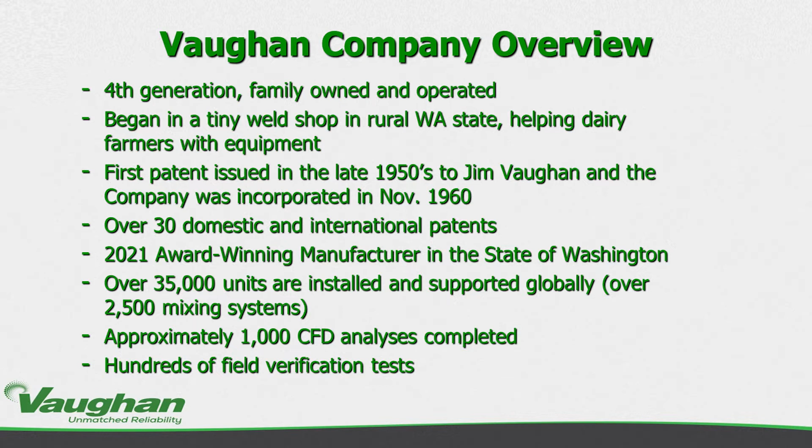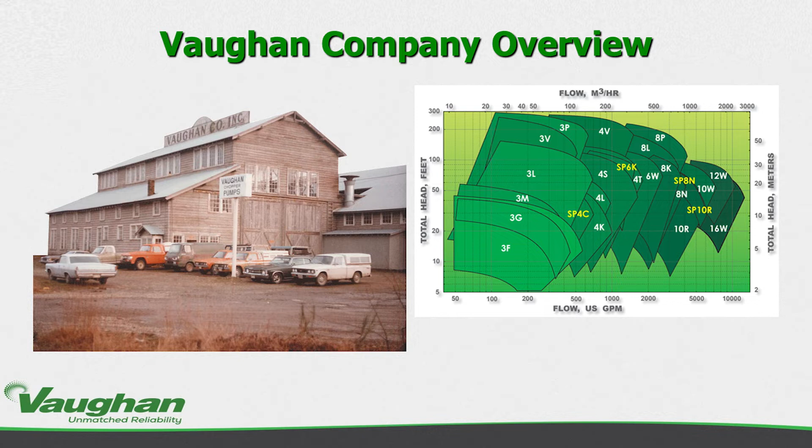I'm giving you a little bit of overview of a full map range. We sell pumps all the way down from 50 gallons a minute up to in excess of 13,000 gallons a minute. And we're all operating out of what has become a much expanded old Schaefer logging mill here in Montesano, Washington. We have just a massive holding of inventory, and in today's global economic situation, having inventory here domestically in the United States ready to ship to you when you need it is more important than ever.

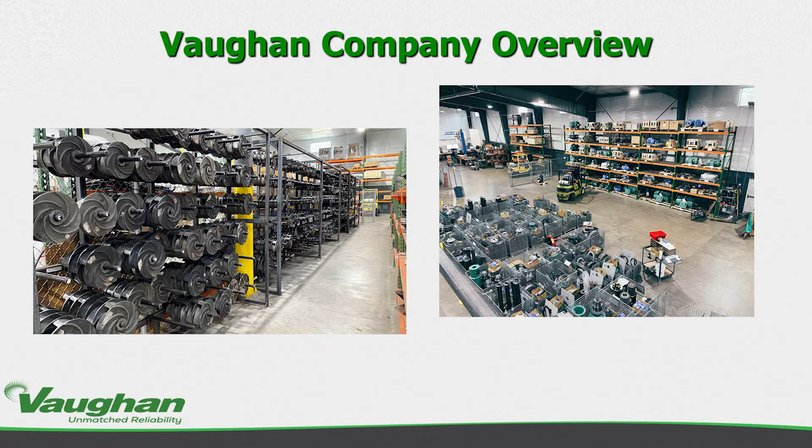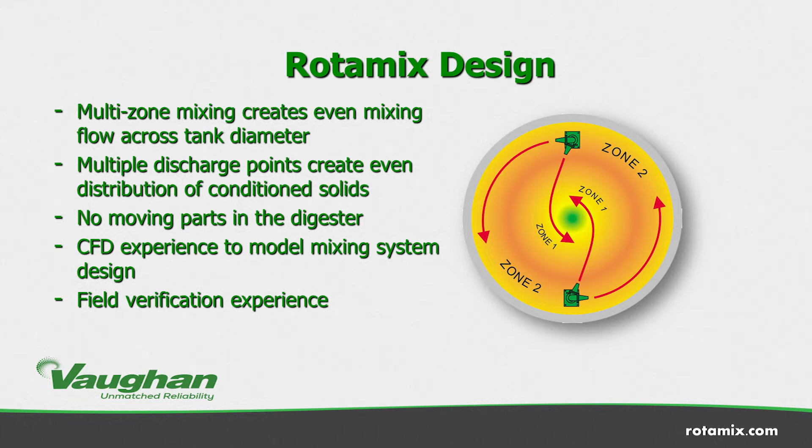So Rotamix mixing systems, they're hydraulic mixing systems using fixed nozzles and external Vaughan chopper pumps. Rotamix design is a multi-zone mixing, which creates even mixing flow across the tank diameter. Its multiple discharge points create even distributions of conditioned solids. No moving parts in the digester, CFD experience in every system, and field verification experience to make sure that what you install is operating and commissions exactly as designed.

Some of our previous Vaughan webinars covered various topics: from wipes, designing for the new sewage reality, covering some of the more unique challenges facing our collection systems across the world and in the United States specifically. We have In the Mix, Dealing with Indigestion, all talking about different steps in the digestion process and different influences that mixing and other operating conditions have on those processes. And then Bypass the Competition, Avoiding Cleanups with Portable Pumps, looking at our portable pump options and the importance of bypass for maintaining robust operations at facilities. I'll mention all of these are on demand at chopperpumps.com/education and also on our YouTube page.

So the value of digester mixing. Why is digestion mixing important? And the answer is mixing is essential to the biological process.

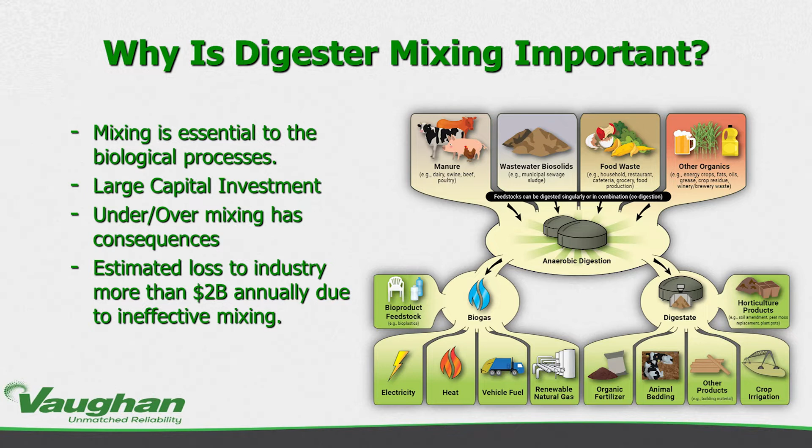It's a large capital investment, and over and under mixing has consequences. It's estimated that the loss to the industry, to municipal and industrial digestion, is more than $2 billion annually due to ineffective mixing. And this isn't just power costs. This is decreased dewaterability, additional sludge disposal fees, additional polymer costs—all of these additive things that add to the cost of operating your solids handling process, adding up over time during the multiple decades of operation of a facility during its design life.

So what does poor mixing look like? Instability with temperature variance, inhibitory pH—anything below 7.0 is going to start to inhibit your methanogen activity. And if you have poor mixing, you're going to see natural contaminants come through from your waste stream that you're not going to distribute and dilute. There's an old saying: the solution to pollution is dilution. When we look at contaminants in our waste stream, to the extent that we can't remove them, we try to dilute them so they have less impact on our biomass and aren't as destructive.

And inconsistent gas production. When you have poor mixing, you're going to have kind of a boom-bust gas production cycle, where every time you feed you provide that contact but don't distribute it evenly. So you get an uneven biological activity rate and see uneven gas production rates that spike and lag as you feed and as your feed changes.

And then operational challenges—we look at loss of volume from grit accumulation, scum surface accumulation taking up headspace, foaming issues, and ultimately these can lead to digester upsets and, unfortunately, bypass.

Eric, this is Steve Mack. I don't know if you can hear me, but hey, you're doing great so far. Thanks, Steve. How's everyone doing? Don't you just love technology? Absolutely. So, hi everyone, yeah for sure. So boy, do we look forward to getting back in front of everyone. We're so happy that you're here in this forum, but I'll take over from here and continue on the way, as we've been doing.

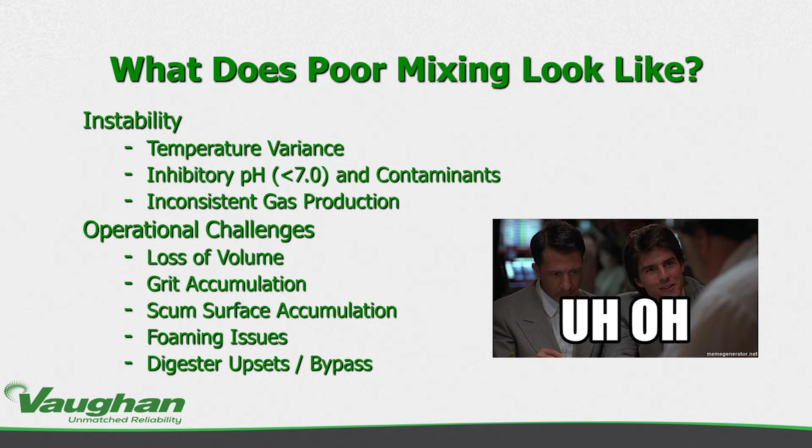Let's move to the next section of our presentation. We've talked a little about why mixing is important, and I'd like to talk next about how we design and verify mixing historically. Our industry has used different evaluation metrics that focus on ways to design a completely mixed digester and then verify as best we can that it has been built.

Historically, we start the design process with spreadsheets. We put in information including influent solids, mass, volume, substrate characteristics, and target operating parameters. Often we use a biological process model, BioWin or Sumo are very common. On the design side, we can use computational fluid dynamics to model velocities and shear stresses, to predict as best we can what's going to happen inside a digester, including piping interferences and actual geometry.

On the verification side, once it's designed, our biggest fear is that we built it for a certain volume and we're not going to meet our design requirements. So the design experience, including CFD and biological process modeling, is critical for partnering going forward.

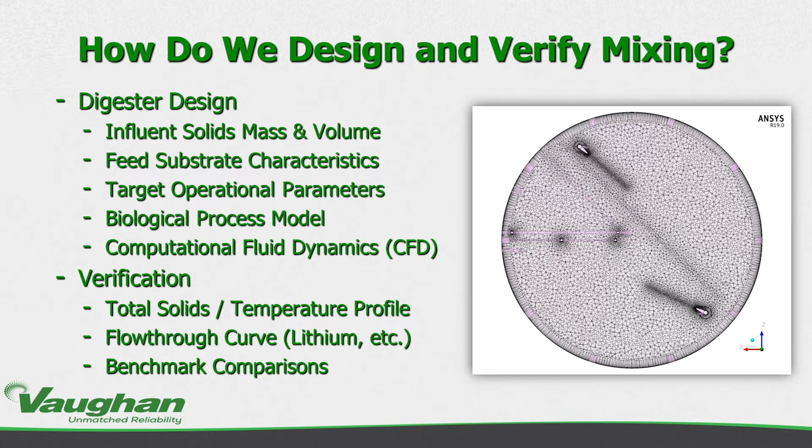All of that has to do with understanding and achieving a completely mixed digester, with a phrase we use a lot: active volume. Something like 90% active volume is typically seen in a specification. So what does that really mean?

These techniques are focused on achieving a minimum volume required to have success with the unit process. The volatile solids destruction we're trying to achieve, based on the specific rheology and the specific mix of blends sent to the digester, can only be achieved, let's say, with a 1 million gallon digester.

So we know from experience that we typically build in a roughly 10% margin of safety - 1.1 million gallons - and a requirement of 90% active volume will give us what's needed in the biological model to achieve success and meet regulations and our permit.

Although there's no clear industry definition of active volume, typical metrics we look at include CFD finding volumes of 90% at least with mixing velocities greater than 0.1 meters per second. We also look at statistical analysis of solids and temperature profiles, which indicates we have a homogeneous digester if those profiles are consistent.

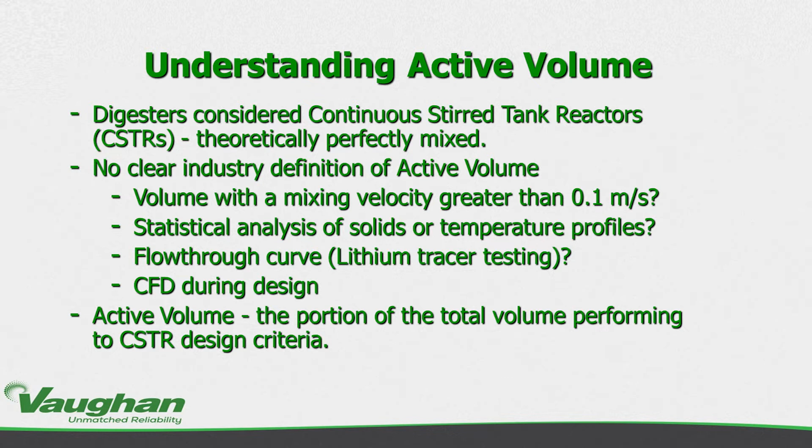Next, let's talk about some traditional design criteria used to verify that maximum active volume is achieved.

Mixing energy has always been a big part of the story, but it's only part of the story. We're trying to achieve a homogeneous mix for reasons we've gone into in great detail in our other webinars - if anyone has questions, please refer back to those or engage with us about why a homogeneous digester is important.

For energy, there are different rules of thumb - WEF MOP 8, Metcalf and Eddy. These are basically horsepower per unit volume; they're similar but use different units, one in gallons and one in cubic feet. Other processes may have different mixing energy requirements depending on rheology, and many factors can influence how much energy you need: tank geometry, rheology, and different obstructions.

That's where we've found in our experience that horsepower alone is not enough to build a digester - you need to consider CFD and all those other factors. Next slide, please.

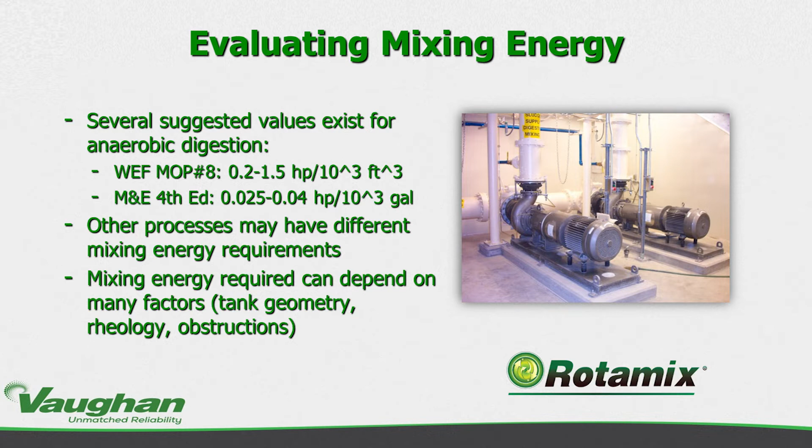These systems run 24/7, 365. So of course we understand that they're trying to have effective mixing with the least amount of power and the least operations and maintenance costs. And that has been a standard for many years, and we certainly like to hit that one out of the park.

There's other things we're going to be talking about shortly, but once the digester is built, how do we verify? Typically, temperature profile and total solids testing is something that we do. Vaughan ourselves has performed over 250 of these on-site physical verifications. They can be done in a few hours.

Typical acceptance criteria is looking for a vertical temperature gradient. At sample points it does not vary by more than 1 degree Celsius. That's based on what's needed by the methanogens doing their job in this digester, and again, total solid samples not varying more than about 10% of the arithmetic mean. So we look at those things. Again, that's all verification that our design is sound and we've achieved what we set out to achieve.

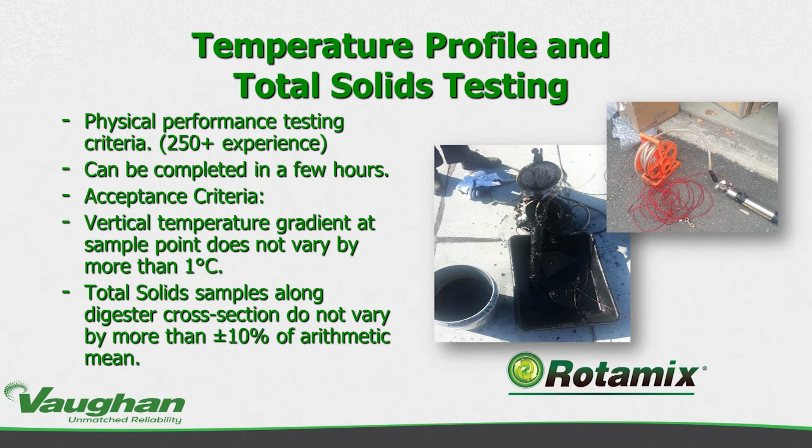So what's another critical tool that aids in the design is a CFD model, computational fluid dynamics. We can easily look at different mixing system alternatives. We can vary the design, nozzle placement, where we're putting our energy. We can model unique geometry, sludge rheologies. We can look at, with the non-Newtonian fluids, where the shear is occurring and how that translates into velocities.

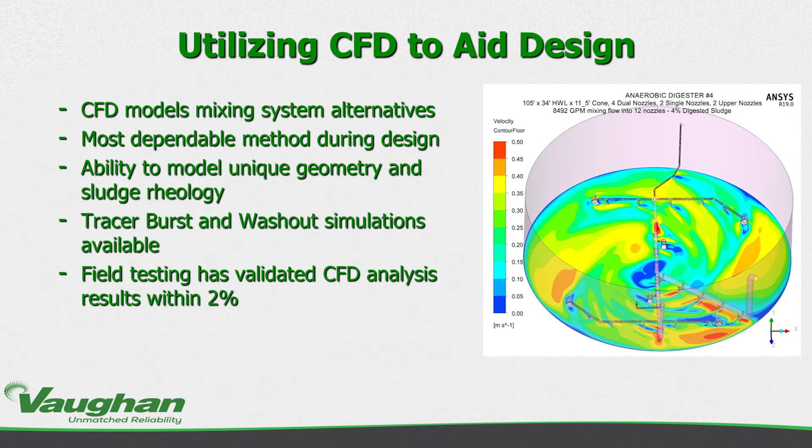We can simulate tracer bursts, washout simulations. The key there is doing this over time and having the field experience to verify that your CFD was correct, and to backfeed your future CFD analysis. So what we've seen at Vaughan is field testing has validated our analysis within 2%. That just means a washout simulation in CFD matches an actual, for example, tracer or temperature solids profile in the field. If we're looking at 97% active volume in our CFD, we're seeing within 2% of that in the field. Next slide.

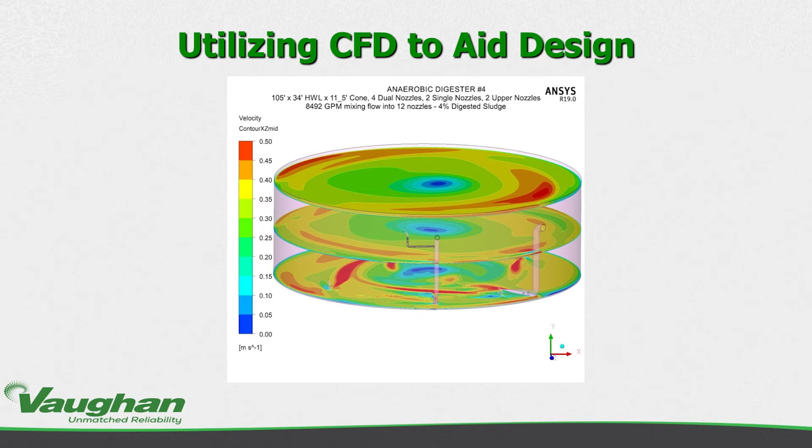Here's another example, we got one more slide after this one. It's just again showing some of the velocities and what we use to simulate and verify that our design is going to achieve complete mix. We have a library of these available that we refer to. So chances are any project that's being worked on, we've seen a similar diameter or orientation or rheology, all of the above. We have over 1,000 of these CFDs under our belt that we refer to, certainly some of them are available. We can perform a custom CFD as needed. If you have a large project and you really need that peace of mind, we can certainly do that.

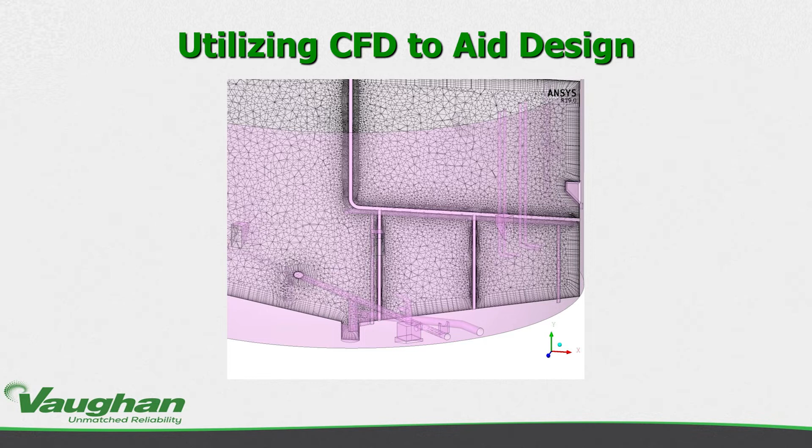So really showing a couple of pictures here of sort of what these look like. There's certainly a lot more to it. There's an entire presentation we've done on CFD, so please engage with us if you have further questions.

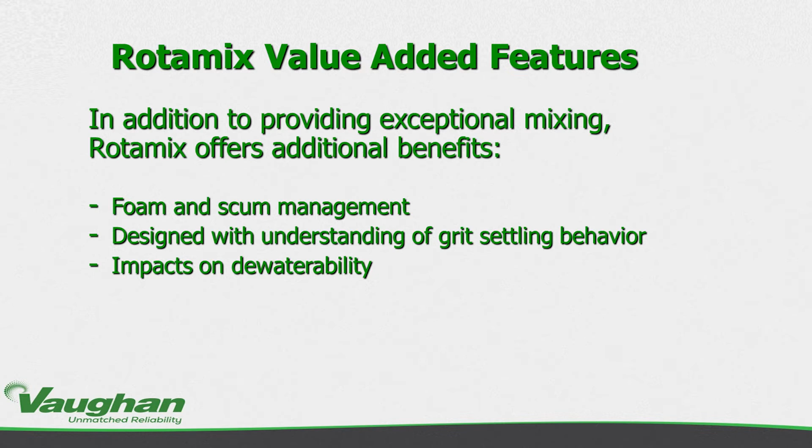This first topic is near and dear, and we saw in that poll that this is a common problem. We've done a specific webinar on the causes of foam and low density scum accumulation at the top of the digester—there are many reasons for foaming events. Chances are more than 75% of anaerobic digesters nationwide, or globally, will at some point experience a foaming event. I'd like to point you to our previous webinars for details on the causes of that.

But as far as mixing goes, there are some things we can do. Obviously, keeping a completely mixed digester will minimize foaming events—that's what the system can do to help, outside of other forces. And with scum, we can do things to try to keep that layer incorporated with the entire volume.

Those impacts are sort of qualitative in terms of performance and gas production. There's operational costs, equipment issues, potential structural damage from some foaming events, and safety costs—there's real value in keeping personnel safe, not having them slip on surfaces hit with foam. From a regulatory standpoint, we want to avoid permit violations from an overflow, and worst case, insufficient volatile solids destruction. These are the known qualitative and quantitative impacts of foam and scum we're all aware of, but how do we combat them with a tool in our toolbox—a mixing system.

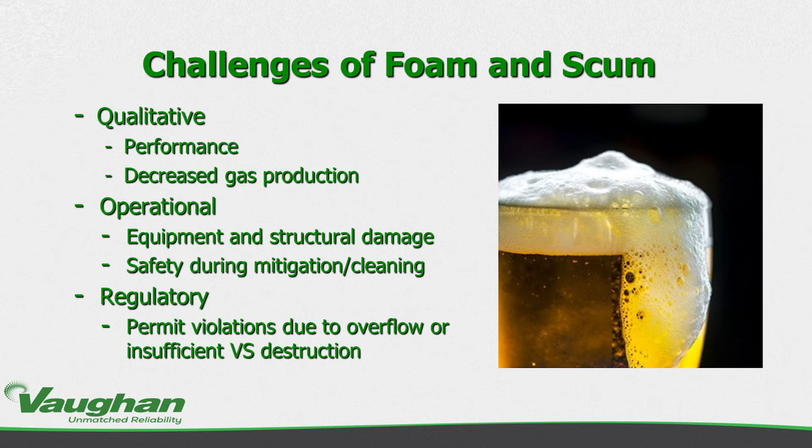Next slide. In our design at Vaughan, we have what's called a foam buster and a scum buster. These are nozzles; in the case of the foam buster, it's located above the liquid surface with a splash plate. We're showering a fan of sludge, high density, from the bottom of the digester through the pump, conditioned with a chopping action, and putting that down on top of any foaming event. This can be valved and used as needed, but since we don't always know when foaming events start, typically this just runs. This nozzle isn't imparting any horsepower into the mixing energy.

We talk about previous evaluations where we look at horsepower—Vaughan has put this tool above to combat foam, knowing it requires some horsepower to move liquid through this nozzle, but its value is in physically combating foaming problems. Throughout a wastewater treatment plant, where there are other areas in basins with foaming events, we typically find a way to spray liquid on top to physically knock down foam bubbles. This is essentially what we're doing in the digester, and it adds value. We have case studies that discuss that as well, which we can share with you.

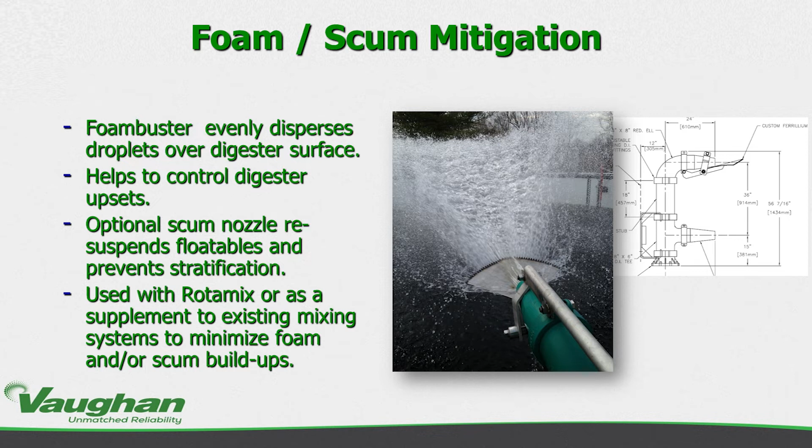One other tool we have to mitigate foam is a VFD, variable frequency drive. It offers some flexibility, allowing you to fine tune mixing energy for current processes. A nice byproduct of that is it can save up to 50% of energy costs, as we mentioned earlier.

It's a critical part of any evaluation. We do recommend that for any digester application. There are studies going on right now, in some cases seasonally, with different types of microthrix or different types of foaming causes.

Reducing mixing energy could be helpful. In some cases, there's current research looking at whether dramatically increasing mixing energy could help combat foaming caused by filament bacteria, with some shearing action through our pump, et cetera. So we're looking at cutting edge approaches to something that's been a problem forever with foaming. This is just one more tool in the toolbox to help you combat that.

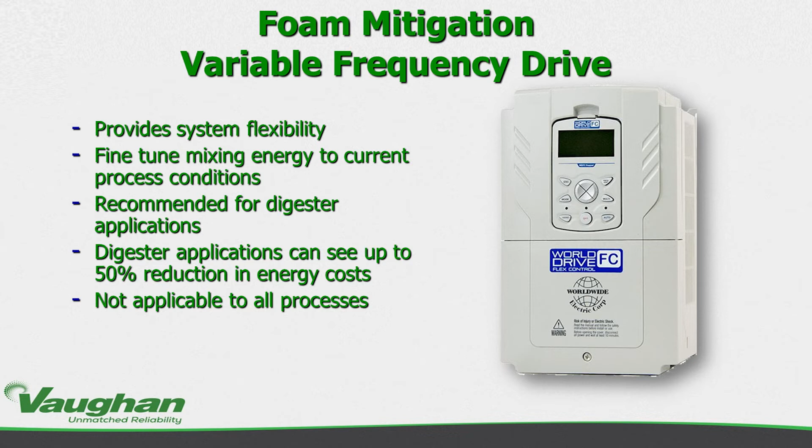Let's go on to grit. Now we've talked about this. It's obvious that grit management is critical for any digester, due to a loss of volume, not meeting your active volume needs, and not getting your volatile solids destruction.

The energy requirements in most designs do not necessarily create the velocities to keep grit from settling. We've all seen these digester cleanout projects. They're often on a 10-year cycle or sooner.

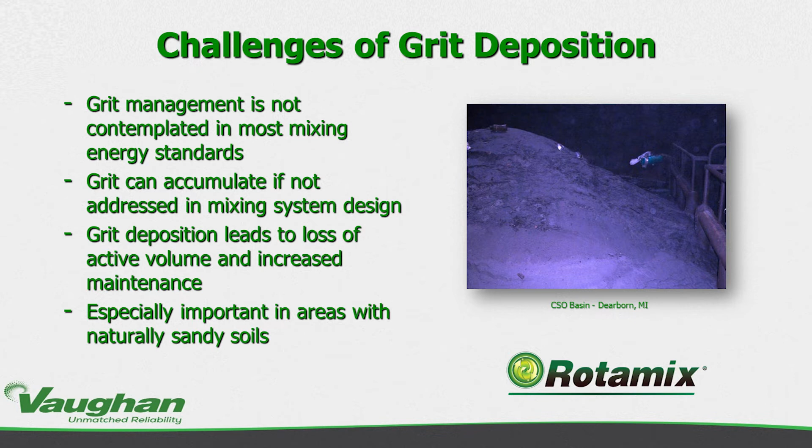I know personally there are some large utilities that are more on a 5 to 7 year cycle of needing to clean these digesters. If they don't do it, they lose their volume, which has impacts on downstream processes, and there's a real cost involved. Obviously it's more of a problem with sandy soils.

What we've learned through experience, and my background at Vaughan, is that even relatively large organically laden grit particles can have what's called a sand equivalent size that allows them to bypass modern grit removal systems. Think of a peanut M&M: that grit particle is the peanut, with the chocolate coating being the low density, low specific gravity organic material attached.

What we've seen is even with a 100 micron, fairly modern grit collection system, these organically laden grit particles could be a large particle over 100 or 120 microns, but behave as a much smaller particle. Once that grit particle is in the digester, it's going to start to digest that organic layer, and it becomes more and more difficult to remove as it behaves like a larger particle.

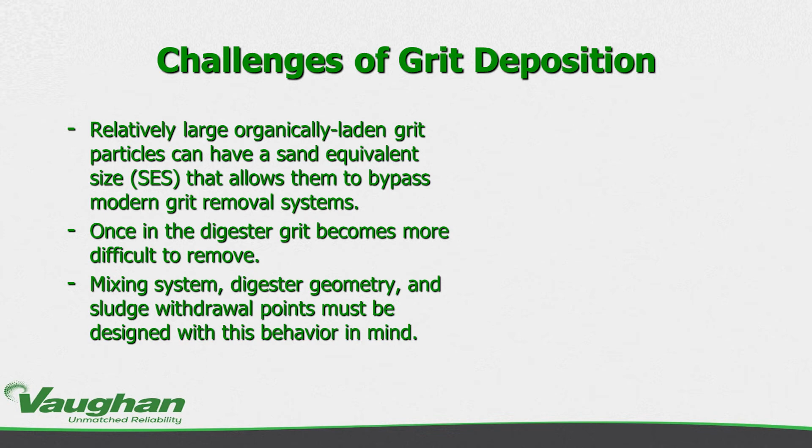There are some studies going on right now that we're participating in, but obviously mixing systems, including digester geometry and withdrawal points, must be designed with that increasing effective grit size behavior in mind. We like to consider that.

Obviously it's an important challenge to all digesters, but even over a 20-year evaluation period, just decreasing the number of digester cleanouts by one or two can have an enormous net present value. Easily, these cleanout projects can cost $250,000 plus, and they can require the digester to be offline for more than a month.

There really are costs beyond just paying a contractor to do this. There's operational challenge, since you're not spending time on other possible improvements. There's procurement costs, which may be insignificant for some utilities and quite significant for others, because this is time value of everyone's time within the utility. So what we found, net result, is if grit makes it to the digester, it really needs to have a pathway for removal, or it will accumulate.

This CFD model on the right shows velocities at the floor level. With our lower nozzles, all of our designs are typically mounted with more nozzles on the floor, and depending on the height of the digester, we'll also have nozzles at a higher elevation. But we really focus energy at the lower level to get that velocity going down where grit could accumulate, and then with the rheology of sludge, those velocities can translate upward.

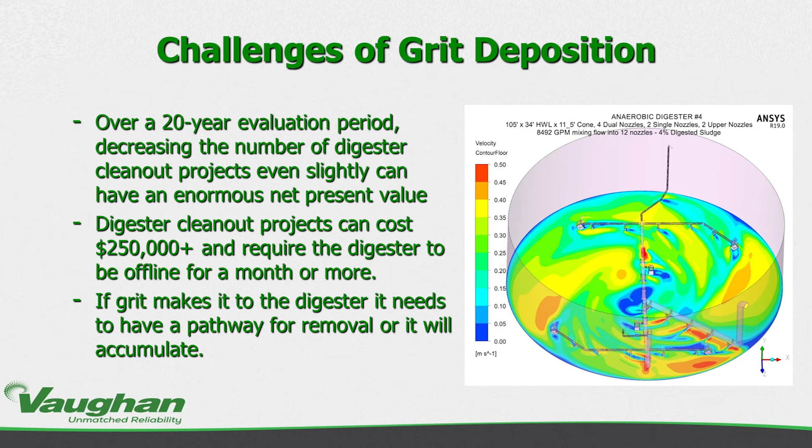So just wanted to throw that out there, that we're quite experienced with grit, and wanted to bring it to your attention as well.

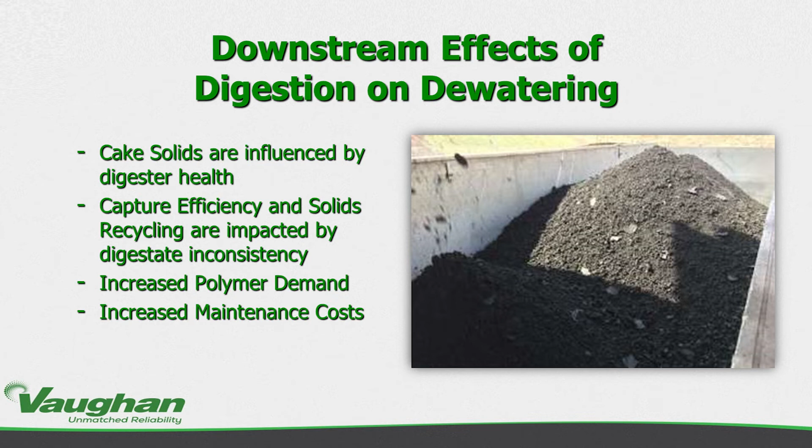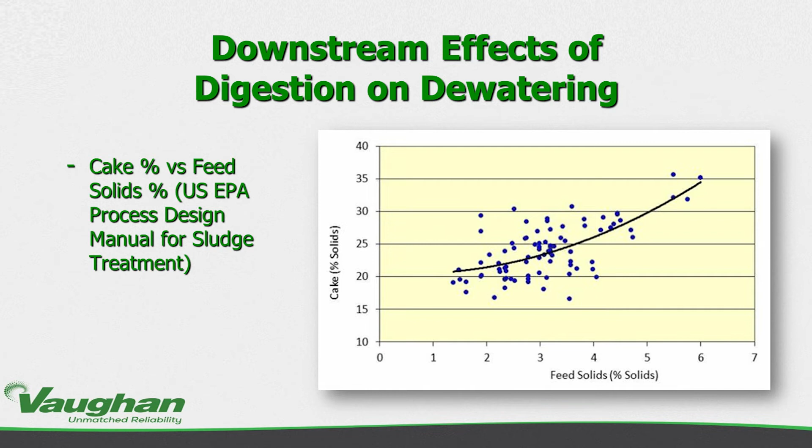Similarly, the percent solids coming out of your digester, thicker to a point, is going to allow your dewatering process to achieve a higher cake solid. Now, having a higher feed solids out of your digester does make mixing with polymer a little more difficult, but the value is there if the digesters are operating well and we can get a high volatile solids destruction and a relatively high feed solids. We see a benefit in terms of reduced polymer consumption and higher cake solids.

So as mentioned, having a consistent digestate to the dewatering equipment—percent solids, volatile solids—is critical for optimizing any dewatering equipment. So if you're going to have a study on optimizing your polymer, your belt pressures, or back pressures on a screw press, or just trying to get the flows correct to whatever equipment you have, it's important to have a steady state, as much as possible, flow coming in from the digester.

And also, one of the things a mixing system can do is continually condition your sludge. There is debris that builds up and re-rags inside a digester, and when that material, if it's large enough, enters any kind of dewatering equipment, it can cause problems that require maintenance, shutting down, problems with polymer systems, mixing, etc.

So keep that in mind. For example, one example of it with a 10 MGD wastewater treatment plant using recent bids on polymer, easily a 2 pound per dry ton polymer savings can represent approximately $30,000 per year. Your mileage will vary. Everyone knows their own polymer consumption and how a pound or two of change in usage could impact their bottom line.

The point here being that, having a consistent flow without the microenvironments of pH, not having a homogeneous flow coming out of the digester with total solids varying or pH, et cetera, can really impact how well that polymer performs, how effective it is.

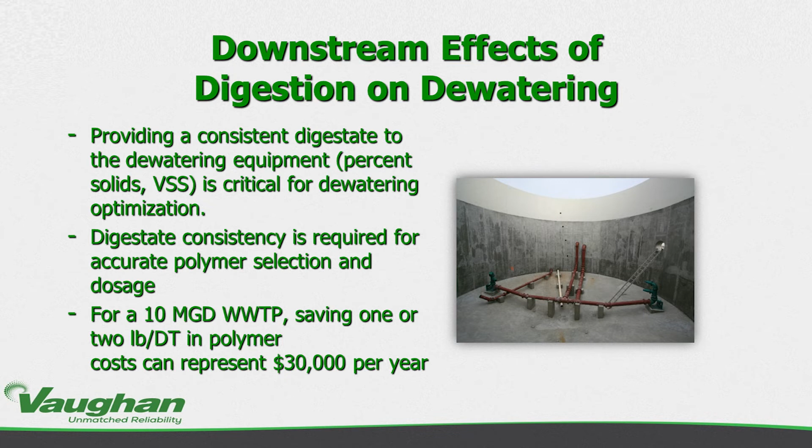Let's summarize here. Next slide. So we've talked initially about the importance of mixing. We've talked about the baseline background for successful mixing, how important it is to create a homogeneous digester volume. All of this is very well known. We want the most homogeneous mixing with the low cost in terms of capital, operations and maintenance, power, well known.

What we also did is added a few other value added features. We know with a mixing system, we can think about reducing the impact of scum and foam on your process. We can at least maximize the amount of grit that's kept in suspension and minimize that loss of volume by focusing energy and just being aware, with CFD and our design, of energy at the bottom, lifting energy that once grit has settled, the lifting energy velocities are much higher than the velocities required just to keep grit in suspension.

You can think of a piece of grit lying on the bottom of a digester as sort of an airplane wing. As the velocity flows over the top of it, that's the lifting energy. But once it's in suspension, much lower velocities are required to keep it there. So the goal is to try to keep this in suspension and remove it before it settles.

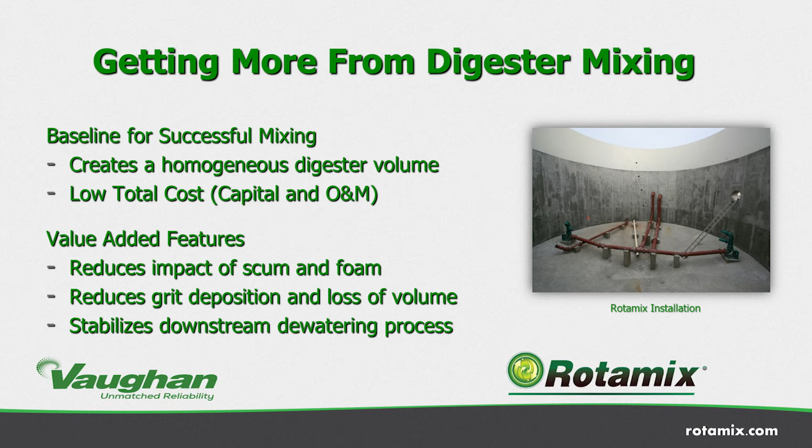And then, of course, stabilizing downstream dewatering processes. So we brought up some points there. Again, there's much more to be explored on each of these. We want to bring them up here so we can ask more questions and really get to some specific costs for your application. So why use Rotamix?

As you mentioned, this mixing system is one that can do more, and we think mixing systems can and should do more. Some of these aren't obvious in the past, but we hope we brought them up here as some things to think about.

We have a flexible design for all different geometries and process applications, and a library of CFD models to lean on to show that. No moving parts or maintenance inside the tank, no areas for rags to build up on different parts and pieces. So we minimize that, and it conditions the sludge best for downstream dewatering process by breaking down large particles, allowing that digestion process to go to completion for maximum volatiles destruction, and of course minimizing costs associated with scum, foam, and grit.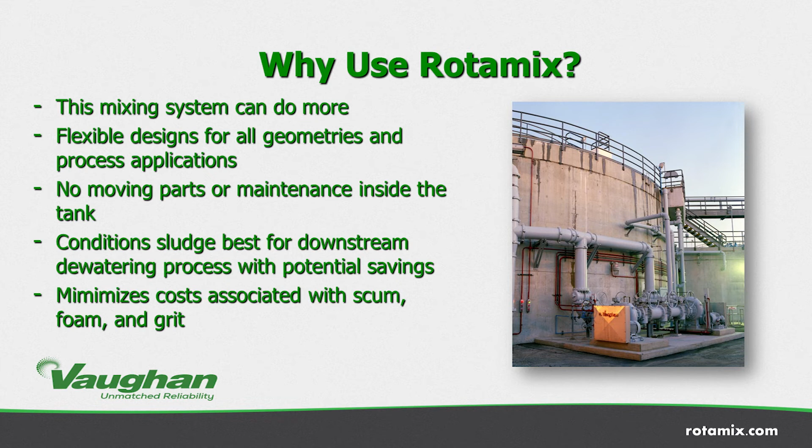Eric, do you want to jump in as well? Yeah, I'll jump in. This is Stephanie again. I am going to be reading the questions out loud to Eric and Steve, and they are going to go ahead and move forward with answering them. I'm going to start with the question at the top here that I'm seeing.

Can you comment on energy calculations for blowers in comparison to active mixing systems like Rotamix? Yeah, I can comment on that. So when you get into blower calculations, you get into two real aeration values that get defined. One is going to be whatever the oxygen requirement is.

So what is that actual oxygen requirement, the AOR? That's going to drive the minimum delivered oxygen that's required. But what often controls the amount of air required for a design is going to be based off of some mixing requirement. Generally that's defined in SCFM per 1,000 cubic feet, or some surface area or volume variation. A lot of that is defined by the various diffuser types and technologies, regarding how they want to do that for different sludge densities, based on the bubble size, whether you're coarse bubble or fine bubble.